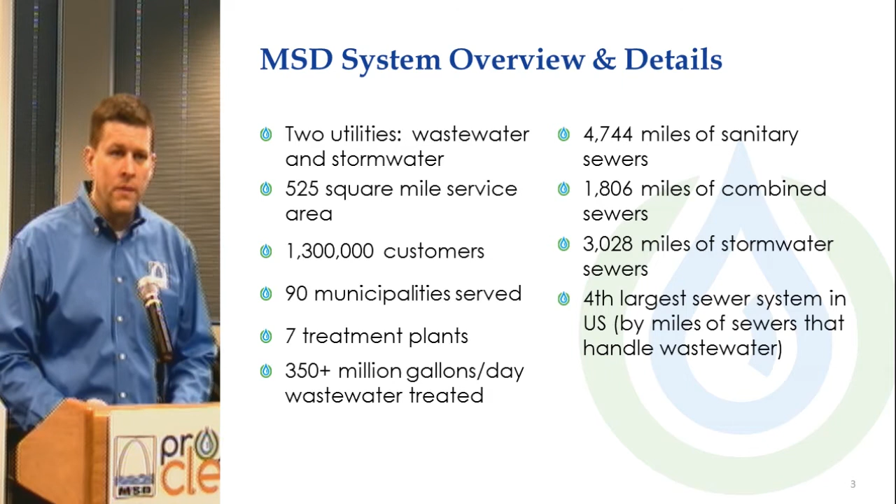This slide here gives several bullet points, several demographic points about MSD. I'm not going to go through each point specifically. Several of them are self-explanatory. But the two points I do want to key in on for you, because it does help inform our conversation going forward, is the first one and the last one.

The first one, two utilities, wastewater and stormwater. MSD is two utilities under one umbrella. We are a wastewater utility and a stormwater utility. What that means for us is that as we perform those two functions, we must account for those revenues and those activities separately. That means wastewater revenues must pay for wastewater activities, and stormwater revenues must pay for stormwater activities.

We can't take wastewater revenues and pay for stormwater activities, and vice versa. So we have to keep those two sides of our business separate, and Proposition Y deals with wastewater, and Proposition S deals with stormwater. That's why that's important.

What's also important, to help you understand perhaps the magnitude of some of the numbers we're dealing with, MSD is the fourth largest sewer system in the United States by miles of sewers that handle wastewater. We have well over 6,000 miles of sewers that handle wastewater in some fashion. Beyond that, we have another 3,000 miles of stormwater sewers. But when you look at those 6,000 miles of wastewater sewers, that places us just behind New York, Chicago, and LA. St. Louis, fourth largest sewer system in the United States.

You may ask, how is that? Well, much the same reason we have 90 municipalities in St. Louis County is why we are the fourth largest sewer district today. Since MSD was formed in 1954, we have taken in 79 separate sewer districts. And as folks moved from the city out into the county in the 19th and 20th centuries, just as they developed those 90 municipalities so they have their own local government, providing their own police and fire and other government functions, they also wanted wastewater service. And that's how we arrived at 79 separate sewer districts that MSD's taken in since 1954.

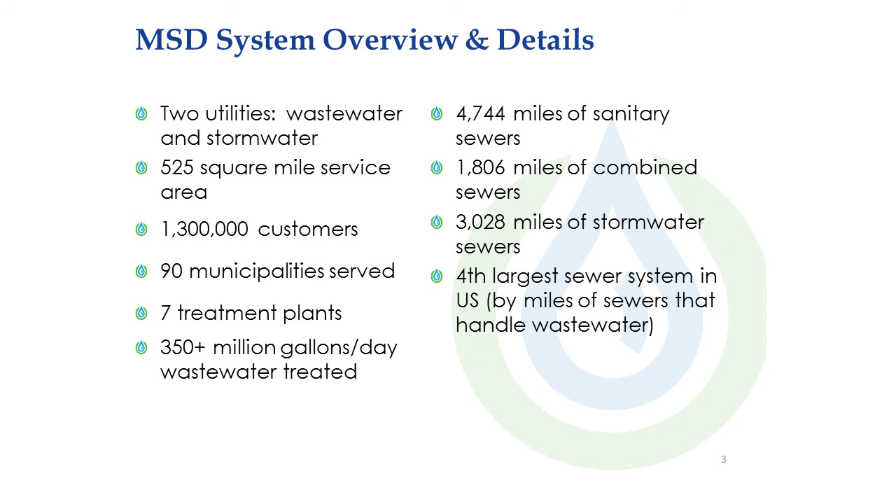So we're a very large system, a very complex system, but we do a very good job with what we have. This map here represents sewer overflows, and a little bit on sewer overflows.

Sewer overflows is the number one issue that MSD is dealing with today. Overflows are, if you would, relief valves that are in our sewer system, and they're there because of the way the system was either developed or they were put there intentionally. And the overflows acting as relief valves during moderate to heavy rainstorms, too much rainwater will get into the sewer system.

Now, when you have too much rainwater in a sewer system, that water has to go someplace. So in lieu of perhaps thousands of basement backups every time it rains, these overflows provide relief for the sewer system. Unfortunately, that relief goes into area creeks and streams. That means during moderate heavy rainfalls, we have a combination of wastewater and stormwater going to area creeks and streams.

Now, certainly not desirable by any means, but it is a lesser of two evils, if you would, in terms of, do you have a basement backup or a sewer overflow? And, in the 21st century, we do need to address that, and that's what MSD Project Clear is about. And I will go into that in the next slide a little bit further.

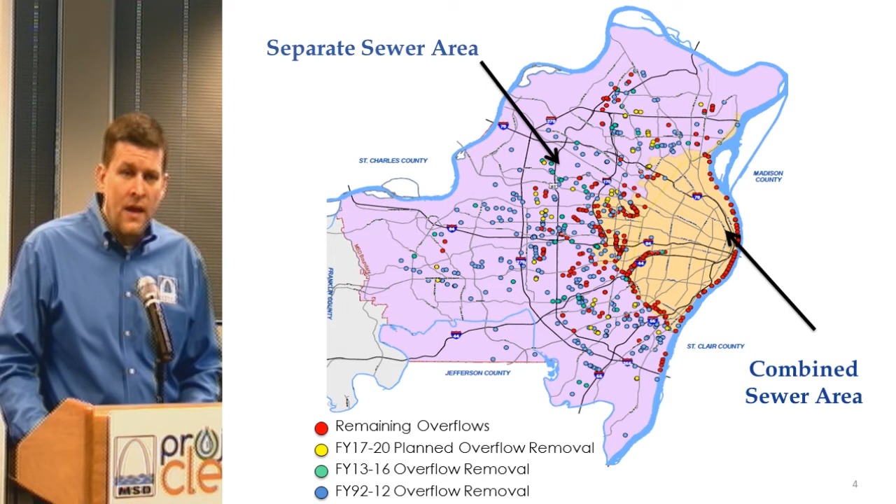But going back to this slide, each of the dots on this slide, and there are several colored dots on this slide, each of these dots represents an overflow that has been eliminated or will be eliminated or addressed in some fashion in the future.

The blue dots represent overflows that we have eliminated between 1992 and 2012. We eliminated well over 300 overflows during that time period at a cost of $2.7 billion.

The green dots represent overflows that we eliminated between our fiscal year 13 and fiscal year 16, currently, which we're in the last year of right now, so we do have a few more to go. Fiscal years 13 through 16 represent the first 4 years of MSD Project Clear.

The yellow dots, fiscal years 17 through 20, represent overflows that we're going to address over the next 4 years, in which Proposition Y will help finance. And the red dots represent overflows that remain to be addressed after fiscal year 20, and we will address those in some fashion as we work through this 23-year agreement with the Environmental Protection Agency and the Missouri Coalition for the Environment.

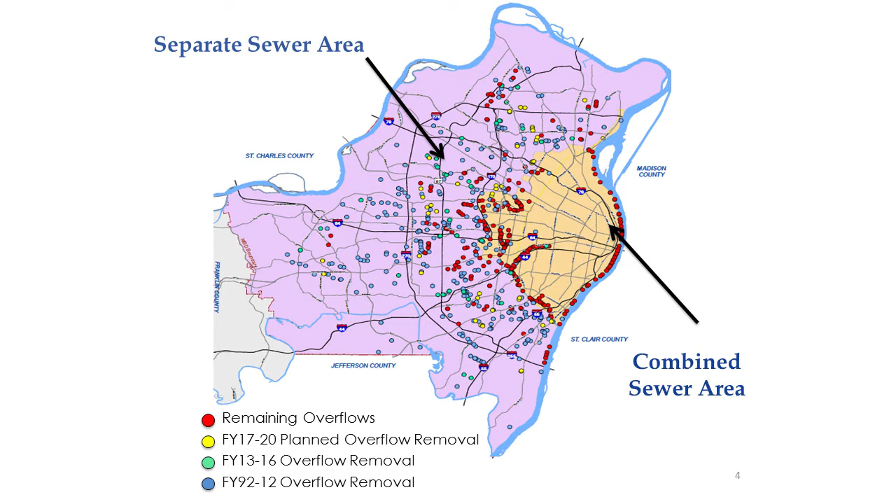I briefly mentioned MSD Project Clear. Let me give a little bit more information about what that is. That is MSD's effort to improve water quality and alleviate wastewater issues throughout our service area.

MSD serves all the city of St. Louis and 80% of St. Louis County. Our general western boundary is Highway 109. I say general, it's not exact, but that's our general western boundary.

And of course, while we're focused on the sewer system within that service area, water flows out of our service area and impacts other communities, not just in our immediate area, but throughout the United States. So we're improving water quality, protecting a shared environment.

The agreement is, MSD Project Clear stems from an agreement that we have with the Environmental Protection Agency and the Missouri Coalition for the Environment. It calls for $4.7 billion of spending on projects over the next 23 years.

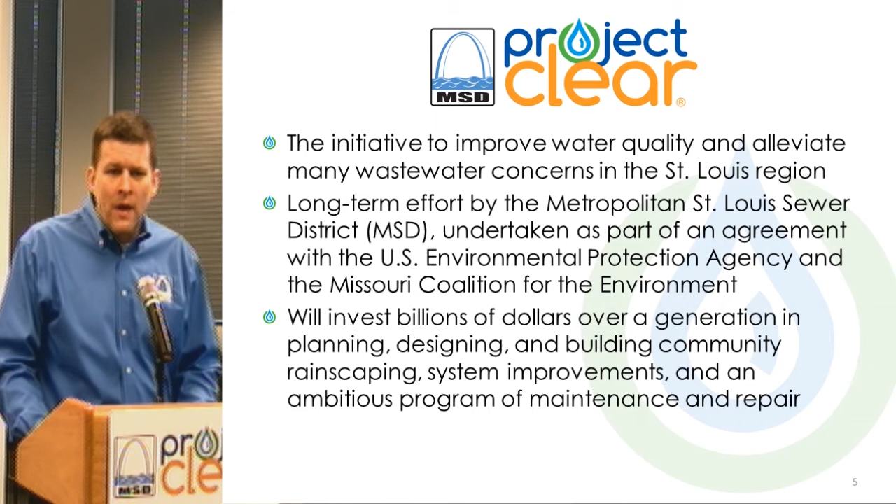The current fiscal year we're in right now is year 4 of that agreement. And as I mentioned, $4.7 billion, it will be a generational investment in a critical infrastructure system. And we're trying a number of new methods and solutions that we haven't tried in the past.

So MSD Project Clear, if you would, it falls into 3 main buckets or 3 main areas of activities: get the rain out, repair and maintain, and build system improvements.

Get the rain out, very much what it says. We want to get the rain out of our system. I talked about too much rainwater going into our wastewater system, causing overflow. So we want to get that rain out of that system, hold it back.

We're doing stormwater disconnections in St. Louis County. By that, I mean we're disconnecting downspouts that have been connected to homes' lateral lines. And if you're unfamiliar with the lateral line, that's what connects a home's plumbing with the public sewer system.

Unfortunately, building methods were carried out from the city into the county as our region expanded. Those building methods shouldn't have been used in much of the county, and it connects downspouts from roof gutters to the lateral line, allowing rainwater to get into a wastewater system that was never designed to handle it.

So over the next several years, we're visiting 180,000 homes, identifying those connections, getting those connections off of our wastewater system, thereby avoiding overflows. We're doing rainscaping in the eastern half of the city of St. Louis.

By rainscaping, green infrastructure called by some, but rainscaping is really reopening the earth, getting rid of blacktop, getting rid of cement, allowing Mother Nature to do more of what she does best, which is manage rainwater where it falls, allow that rainwater to percolate back into the ground, and through that we're building rain gardens and other green features to help manage that rainwater and keep it back from our sewer system.

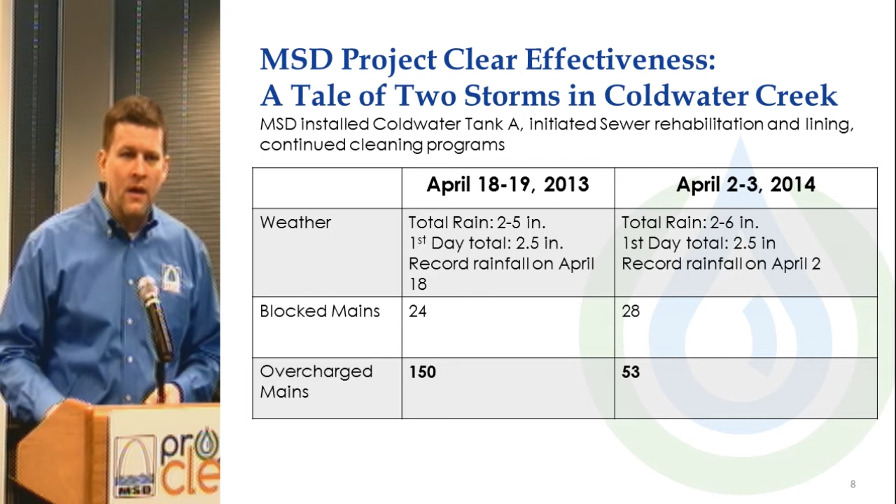Now that I've completed the update on MSD Project Clear, I'm going to talk about our rate commission process and ultimately what led to propositions Y and S being placed on the April 5th ballot.

The MSD Rate Commission was established as part of a series of changes made to MSD's charter in 2000. These voter-approved changes called for a 15-member organization to be formed, thus the Rate Commission, with each organization represented by an individual serving as a commissioner on the MSD Rate Commission.

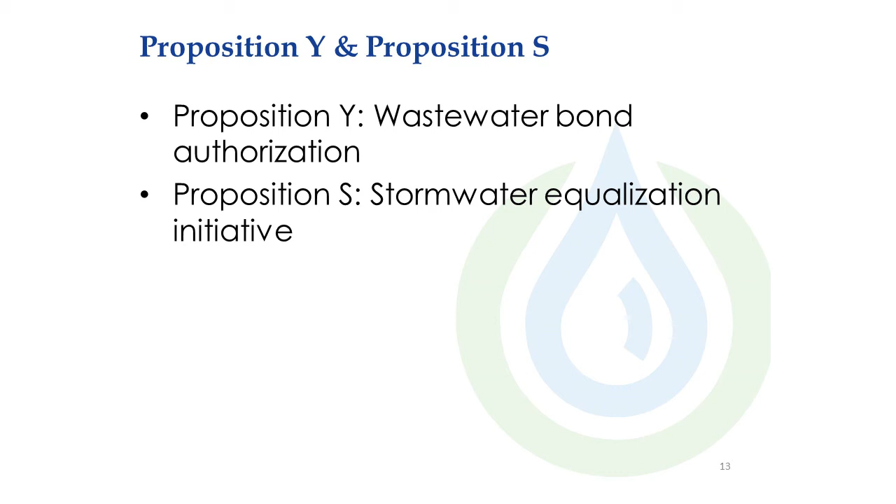I would point out that the Rate Commission did make changes to what staff had proposed, and those changes are on the website on which this video is contained. I will now go into propositions Y and S and provide more detail on the specifics behind each.

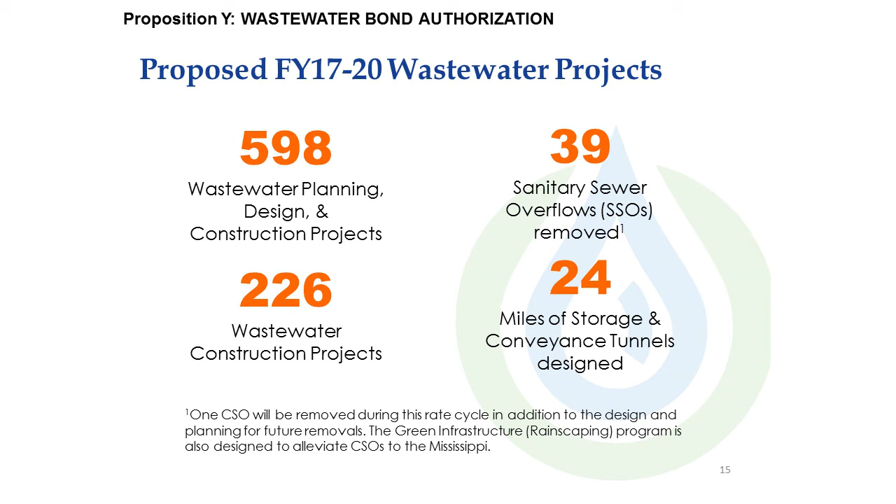Proposition Y deals with wastewater. Specifically, it's wastewater bond authorization for financing of MSD Project Clear. Over the next 4 years, this agreement calls for almost 600 projects for planning and design. We're going to be constructing over 200 wastewater projects, leading to the elimination of 39 sewer overflows. This is the period where we really start a lot of the tunnel work. We will be starting design, engineering, and actual construction of 24 miles of that almost 30 miles of tunnel. So this is going to be a very busy 4 years as part of MSD Project Clear.

Where are those projects going to take place? Well, as I mentioned earlier, this isn't a city versus county issue, this isn't an old versus new issue. These issues, what we need to do through MSD Project Clear, impacts our entire service area. These dots represent where the projects are going to take place over the next 4 years. Again, you can see a regional-wide, service area-wide program of construction activity.

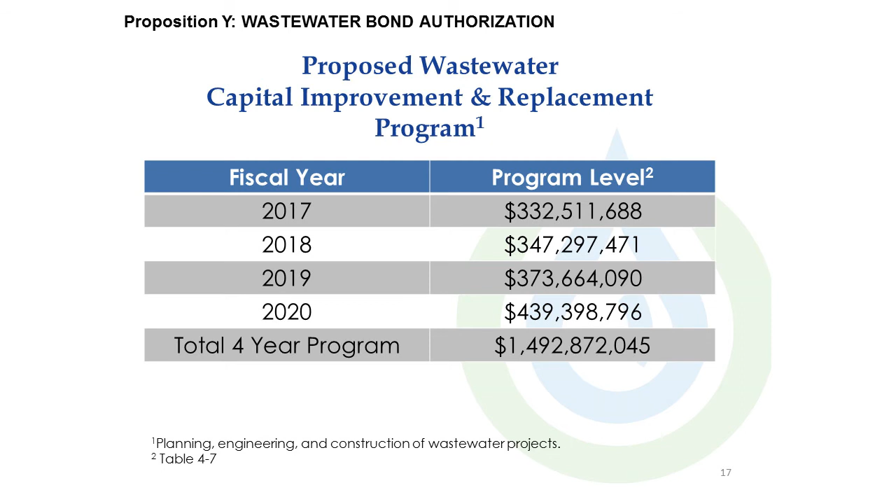Moving on to the next slide, MSD Project Clear calls for $1.5 billion in projects over the next 4 years. This slide, slide 17, details the amount of spending we project by each fiscal year and how we pay for it. This is where we get into the nuts and bolts of what voters are being asked to look at on April 5th.

This slide really gets down to the meat and potatoes of what Tuesday, April 5th is about and the voters' decision on Proposition Y. As MSD has done in the past, specifically in 2004, 2008, and 2012, MSD is once again bringing forward for voter approval, asking voters: do you want to use bonds to finance the next 4 years of capital work at MSD?

This work, let me be very clear, this is strictly a financing question. If this gets voted down, the work still has to happen. And I would ask voters, if you love MSD or hate MSD, don't cast your vote based on that. This is really a financing question and how you want this program to impact your pocketbook.

So as we have done in the past, we're bringing forward a proposition to voters, asking them: do you want to use bonds and approve bonds to keep rate increases lower in the near term, or do you want to not use bonds and allow rates to go up higher in the near term? There are pros and cons to each of that.

So let me go through the left column here. If voters say yes to Proposition Y, MSD will issue $900 million in bonds to finance $1.5 billion in work, the work we just reviewed in the previous 3 slides, done over 4 years. What will that do to the average single-family household monthly bill? Today, that bill sits at about $40 per month. By 2020, that will go up to a little over $60 per month. Those percentage changes you see next to those numbers in the left-hand column generally apply to all customers.

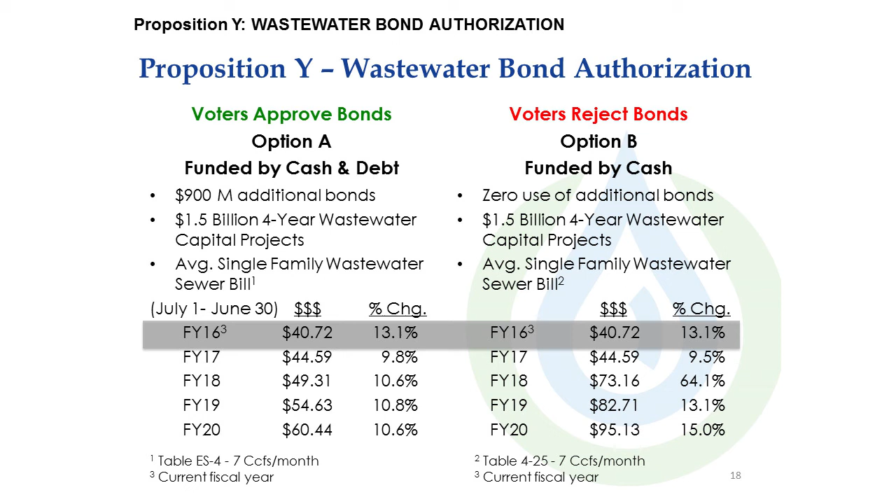Well, now that I've explained Proposition Y - and again, Proposition Y deals just with the wastewater side of our house, MSD's function as a wastewater utility.

I'm now going to move on to Proposition S, which impacts the stormwater utility side of our business. In terms of stormwater, MSD really provides just 3 basic services. I know there's many views that folks have of MSD in terms of how we provide stormwater services and what we should be doing.

But at the end of the day, these are the 3 functions we should be doing. First is overall stormwater management in our service area. That is to say, we should respond to stormwater complaints, we should document them, we should evaluate them, we do water quality work. The second function is compliance with our area's Phase 2 stormwater permit, a series of stormwater regulations passed down to us by the state. A lot of it includes public education, also regular inspection of our creeks and streams.

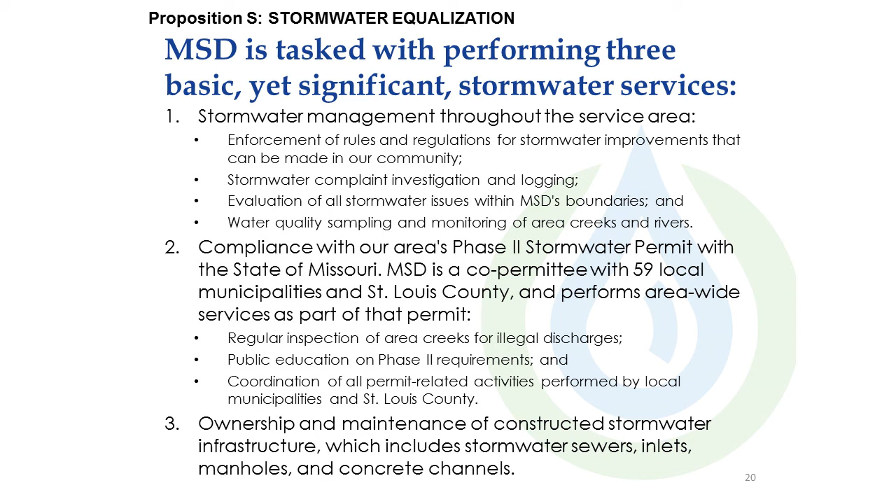There are activities we embark on in coordination with the 59 county municipalities that fall under that permit, activities we must make sure happen in terms of best practices for stormwater. Then the third, and perhaps most important function we do as part of stormwater, is the ownership and maintenance of the actual stormwater sewers. That is to say, the bricks, the mortar, the metal of stormwater sewers, we must maintain and operate.

But our biggest issue has been stormwater funding, and we have tried on several occasions over the last couple of decades to address it, but we've been stopped for various reasons. Most recently, we put in place a stormwater impervious fee in 2008. We were taken to court over the implementation of that fee. We lost, eventually before the Missouri State Supreme Court. But the problem of stormwater still exists.

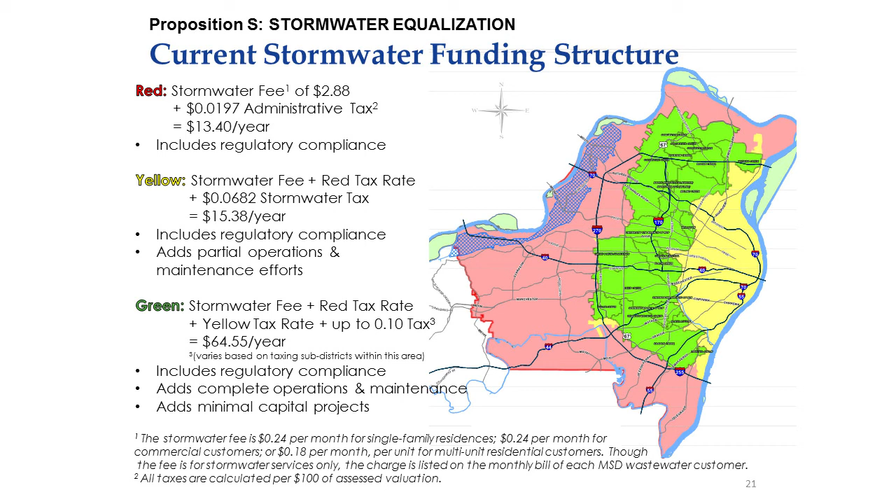So what this has led to, and what we've been dealing with here at MSD since we took over stormwater management in that red area of the county in 1989, is a very inequitable stormwater service system in terms of the services delivered. Well, we want to fix that. Before I go into what we're proposing through Proposition S, the appropriate solution for our inequality in stormwater services, let me go in a little bit more detail with what we're dealing with in that red area.

We have over 1,100 miles of creeks. We have to walk these creeks and inspect them. That is what's called for through the stormwater regulations. There are 2,600 best management practices, stormwater facilities built to manage stormwater and comply with regulations from a private development side. We have to inspect these. This work is currently funded, but this is all we can do.

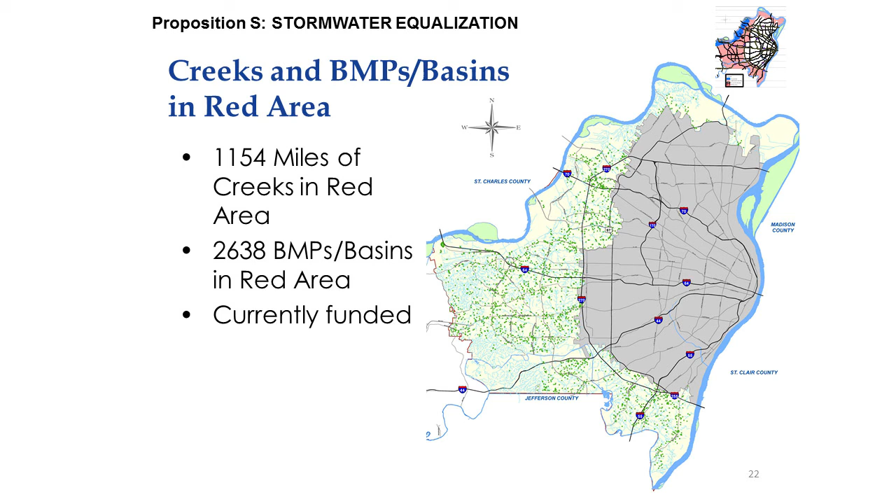When you go to, on the next slide, what we can't do, there are over 1,300 miles of stormwater sewers in that red area that we cannot maintain due to lack of funding. That is to say, since 1989, stormwater sewers have been built to MSD standard, deeded over to MSD, and we have no money to maintain them.

So if you as a customer have a collapsing stormwater pipe in your backyard, and many folks are familiar with the situation, we will come out and visit, we will assess the situation, but we can't do anything about it. All we can do is give you advice. And it is not the position that we want to be in at MSD. We want to be out there serving the community, but we have to have the funds to do the work, and we have to be able to do it in a legal way. Again, as I mentioned, we can't take taxes from one area and spend them in another area.

So what we are proposing, on this next slide, is to roll back and eliminate some of those taxes, leave in place one tax district, and eliminate that stormwater fee. What this map represents is that blue area. Underneath that blue area remains the red area tax, a district-wide, service area-wide tax that we're going to leave in place. And that money is going to go specifically and only towards regulatory compliance work for our entire service area.

The blue on this map is meant to represent a new up to 10 cent per $100 assessed valuation tax that we will put in place for everybody. And you combine those two taxes, it will be almost 12 cents per $100 of assessed valuation. When we do this, what folks will get is complete stormwater service.

Finally, everyone will have the ability to receive complete stormwater service. We will do the regulatory compliance for everyone. We will have complete operations and maintenance of the stormwater system for everyone. And we will have very limited funding for some capital projects.

As I mentioned, we're going to eliminate and roll back some taxes. We'll eliminate the yellow area taxes, we'll roll back to zero the green area taxes, and we'll eliminate the stormwater fee that comes on each MSD bill. So what does this mean for the ratepayer's pocketbook?

Going back to that color-coded map, keep in mind where you live. If you live in the red area, what you pay to MSD annually for stormwater service will go up about $47 per year to over $60 per year. That's a big increase in percentage terms, but you're finally going to get stormwater service. The red area needs stormwater service.

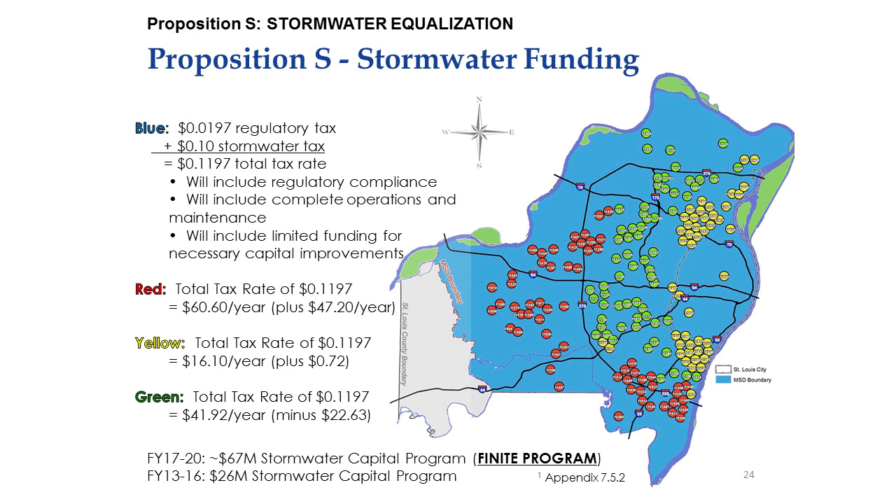We'll take that information and go back to our rate commission. Anything more that we do would go to our rate commission, our board of trustees, and then have to go before voters again for approval. But before any of that can happen, Proposition S is about equalizing the taxes that everyone pays, treating everybody equally under the same tax structure, and treating everybody the same in terms of the services they receive. That's what Proposition S is about on the April 5th ballot.

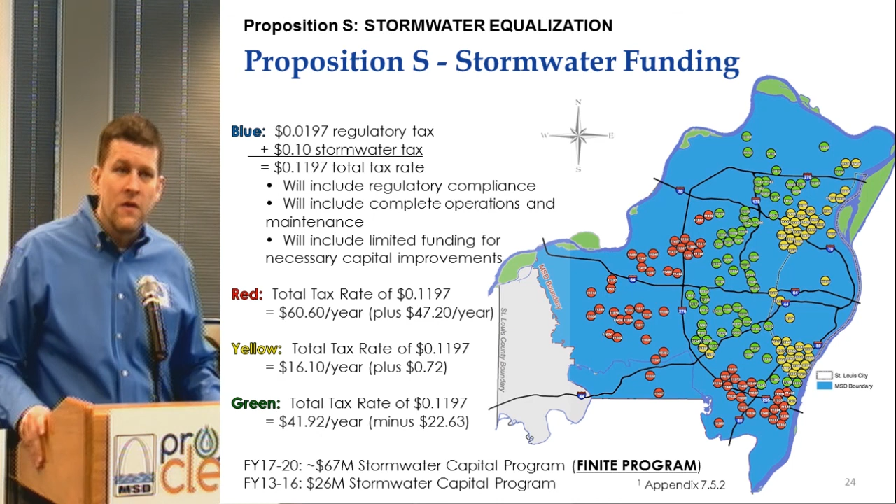So now that I've shared information on Propositions Y and S, I've explained the details and how those impact our separate utility functions - our function as a wastewater utility and a stormwater utility. I do ask folks to vote on April 5th.

Please keep in mind, we are not advocating through this presentation or any information we distribute. We're simply informing and educating the community about what these two propositions are about. When you go to the ballot booth on April 5th, I would ask that these propositions not be a judgment on MSD, but that you really look at how they impact you and your community and vote accordingly. That decision is different for everybody, but we want our community to be informed and educated before they go to the ballot booth.